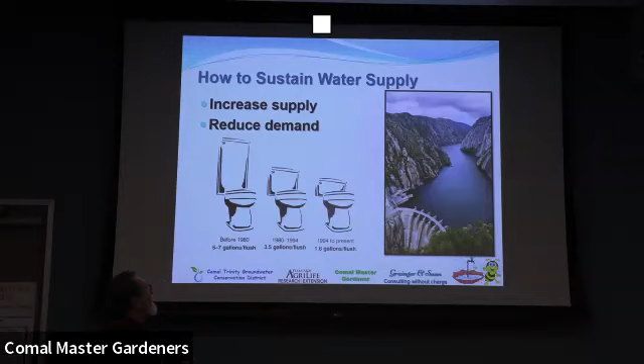So you can reduce the demand for the water. That'll ensure your supply. Well, it turns out that industry is helping us. The declining size of the toilets, you can see that toilets and clothes washing and washing machines for dishwashers, they're all going down.

I recognize that. That's my wife calling.

So you can see the trend is that industry is trying to help us out. And they're doing a pretty good job of reducing the demand on our daily life activities. I often talk about the fact that I keep a 5-gallon bucket in the shower. So when we first start showering, that's where the water goes until it gets warm enough. And then we use that water to water houseplants and water the dog and that sort of thing. So simple things can help save water.

It turns out the state of Texas has a program that was sanctioned by the legislature about 25, 30 years ago, where every year they update a plan. It's a 5-year plan. They take 5 years to develop it, and it looks ahead 50 years. And so they just finished this last one. They call it the 22 plan, but it's actually based on 20 statistics, and they're looking out to 2070.

Well, what do they think is going to happen in this state of Texas over the next 50 years? 70% increase in population and a 17% in water demand. And that is an increase of about 11.5 million acre feet. And I'll get to acre feet in a little bit. Those of you who know me know I'm an engineer and a mathematician, and so I throw numbers out, but I guarantee I'm going to guide you with the big numbers. It's hard to imagine numbers on the scale that we're talking about.

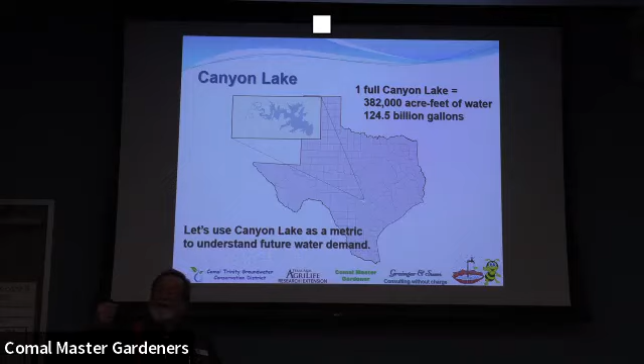Well, that 382,000 acre feet is still a hard number to imagine. So we're going to use it like a spoon. We're going to say, okay, we're going to measure everything in Canyon Lakes. If you had a Big Dipper and you could hold the whole lake. The first thing I want to show you is on a scale of water consumption in the state, how big is Canyon Lake? It's way down here. And that's a big lake.

So who's using that water? This is the growth in municipal demand. Strictly cities in the state of Texas are going to use that much water, and it's going to grow 11.5 Canyon Lakes over the next 50 years. Remember I said we're not going to build but maybe 1 more lake, and it won't be the size of Canyon Lake. So we've got to save water.

Well, who's helping us? How many people in here are interested in agriculture and irrigation? Okay, good. You'll be happy to know that the agricultural industry in the state of Texas is figuring out ways to save water. They're going to drip irrigation in row crops. So the day's coming where you won't flood irrigate a cotton field. You'll have drip emitters on every cotton plant in that field.

The day of the big wheeled sprinkler systems that scatter the water, they're coming to an end. So they're going to reduce it to 8.5 Canyon Lakes. Well, that's still a lot of water. Where does that take us now?

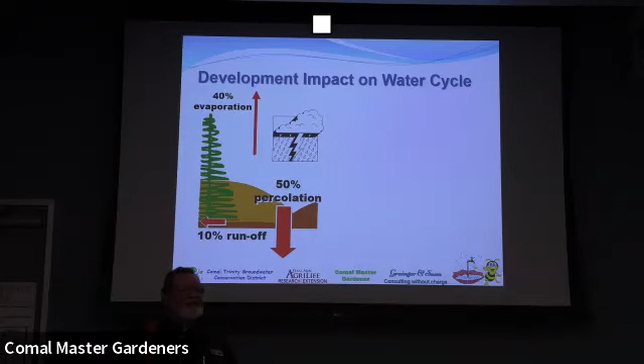Well, as you know, I know you got this in your training, if you have natural land that hasn't been built on, you get about half of that water percolating into the ground. Oh, you get about 10% runoff. But when you start building developments, housing developments, expanding cities, adding roads, you change the nature of the water retention, you flip it. Now you only get about 10% going in the ground, which is what you used to have as the runoff. Now you get over 50% runoff, and that's why we have flash floods. Well, one reason we have flash floods. We do have a lot of natural stone that contributes to that.

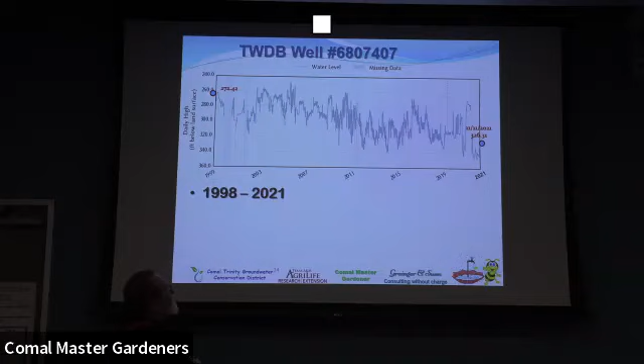This is what that looks like since 1998. This is where the water was. This is where the water is. And when you do a regression through that data, and it's a lot of data, so it's a pretty good curve fit, that decline is 2.5 feet a year. That means if you have a well in that neighborhood area, your well's going down with that at the same rate.

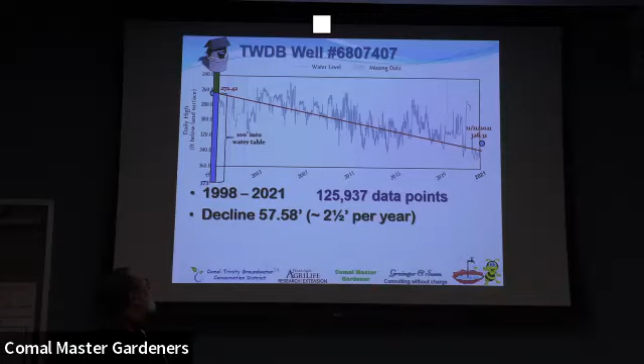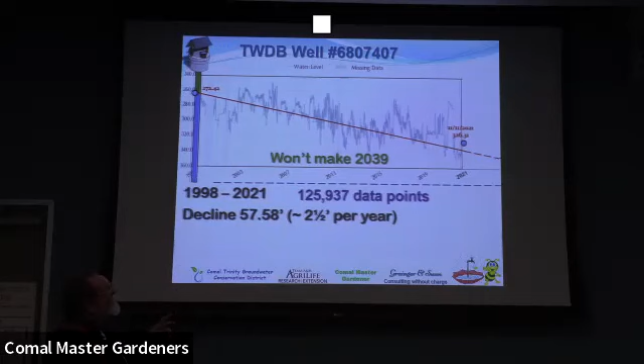And what does that allow us to do? It allows us to look out in the future and say, well, if nothing changed, if no new homes were built and we continued to decline at that consumption rate, where does that take us? Oh, I'm sorry, I forgot one point, and that was that when you drill, you go into the water table, ideally 100 feet, and you won't make it from that water level. There you go. In 2039, that well will be dry because you won't be reaching the water if there is any water below that.

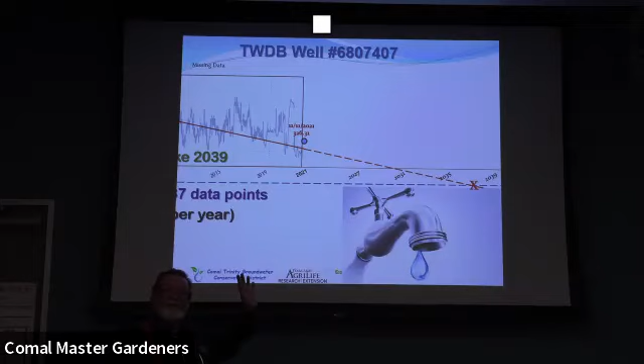So now we can predict how much stress the communities are going to have in the future. And this is not the Edwards Aquifer, this is the Trinity. And Larry's going to have a lot more to say about the Trinity later on. So we're offering you an out. It's not all gloom and doom, it just means you got to change horses.

It's time to change horses and move to rainwater harvesting as your primary source for your surplus water, meaning your outdoor water, or you can go completely internal and have it for your house as well. It's all tax-free with the state of Texas. There's a form that we can provide you, and Larry will explain more about how we come out and do site visits. We're already booked for 3 people in here.

Reducing your water bill is kind of a tricky thing to talk about, but here's what my take on it is. Are you familiar with the concept of take or pay? Take or pay means you buy so much water, if you don't use it, well, they get to keep it. So I pay for 4,000 gallons a month. I rarely have ever used 3,000 gallons a month, and I usually use about 2,200. So I'm paying for water that I don't use anyway off of Canyon Lake.

And my savings in water bills is if I can continue to water when we're in drought conditions, and Canyon Lake says you can't water but Mondays and Thursdays, and maybe you can only water Mondays, and then maybe it'll get as bad as you can only water twice a week. Well, I've had to replace my landscaping twice now, and that's expensive. So I could have saved all those dollars just watering off my system.

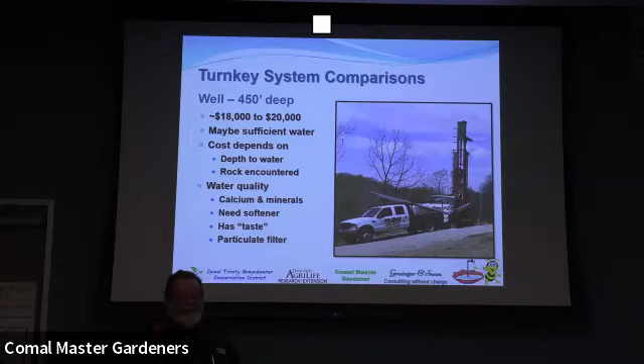Here's the quintessential slide for my part of the presentation. If you are thinking about buying some acreage and you want to put a well on it, this is about what it will cost you and about how deep you'd have to go. As an alternative, you can do rain catchment for almost the same amount of money. In fact, you may save money. And your reliability in the long haul increases your property value. It's not an issue today, but it's going to be an issue soon.

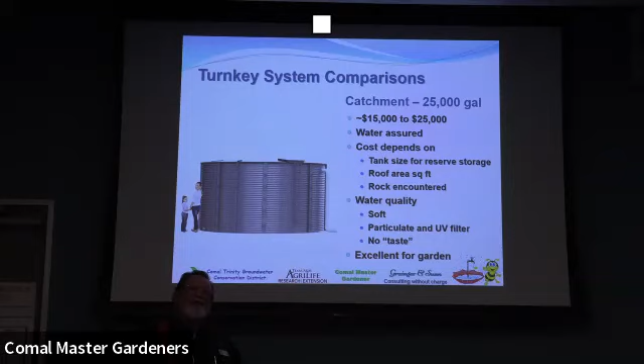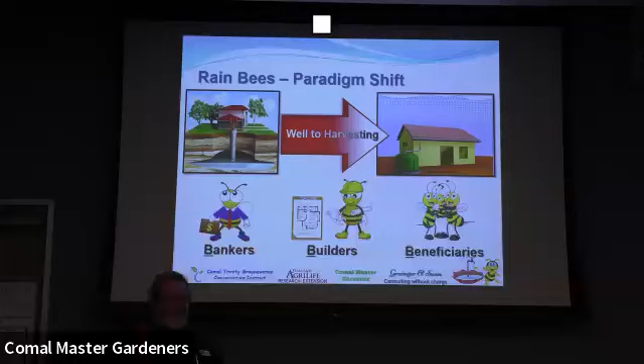So we're trying to do this paradigm shift with people who are building new homes. Don't put a well in, do rainwater harvesting instead. And the people that we're talking to, we want to get the bankers on board that you can roll a rainwater harvesting system into your mortgage just like you roll a well. We're also trying to get the builders to sell the idea to the homeowners, hey, you need to build in your rainwater harvesting system when you're building. That's the cheapest way to do it. It's hard to do afterwards, relatively speaking. And the beneficiaries are you and me. We get to benefit from having better water and more of it.

I am with the Comal Trinity Groundwater Conservation District. I'm the secretary, and our task with the Groundwater Conservation District is to reach out to the public and let you know the situation that we have. We're not trying to be alarmist, but I think in some degree, we need to be alarmed at where we are in terms of rainwater and in terms of the water table that we have in the Trinity.

The Trinity is not like the one that you hear on the news every evening. You hear about the aquifer level. That's the Edwards Aquifer. That's not the Trinity. The Edwards are big buckets of caves of water that we have over on the east side of the county. The Trinity is underneath the entire county, including the Edwards. Where it gets to the Balcones Fault, it goes underneath the Edwards over there. But it's a very slow-moving aquifer.

It starts at Oklahoma at the Red River, comes all the way down here to San Antonio, doglegs all the way out to Ozona. So sometimes when I say that, people say, well, if it's raining in Dallas, we ought to get water here. We don't. We get the water that falls here, and that water takes a long time to get to the water table. 3 years.

No matter which of the systems you are going to be looking at, they have three basic components: the storage tank, anything that happens before the storage tank, and everything that happens after the storage tank. So I'd like to start out by talking about the pre-tank process. We want to filter the water or screen the water as best we can before it gets to the tank. And a couple of ways of doing it.

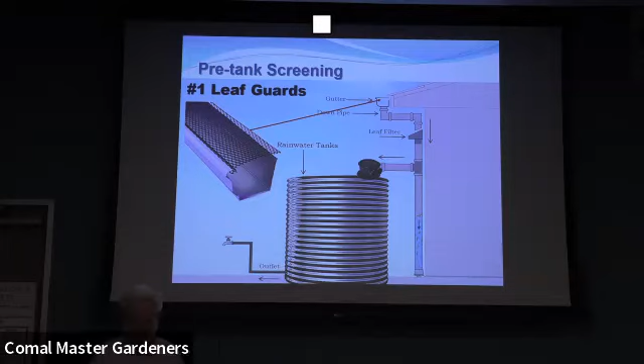First thing we can have is leaf guards on top of our rain gutters. It does not have to be the real fine stuff that the water has difficulty getting through. Open weave, such as you see right there, is perfectly acceptable because we're going to have a second stage, and the second stage is over here, what's called a leaf filter. And the leaf filter has a screen on it that is very similar to something you'd have on your screen door or your window.

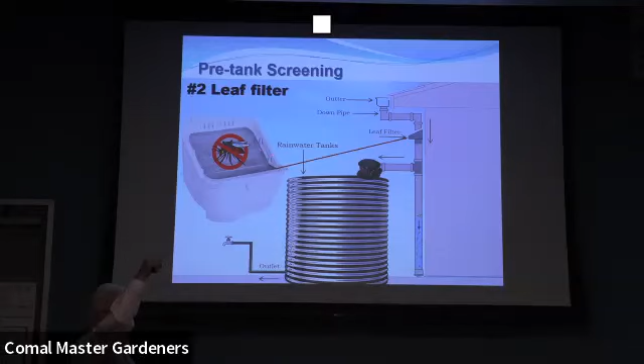And so that screen is going to take some particulate. It's going to fall on top of that screen that you see right there. And as it falls on that screen, it washes away and the water goes through. And that leaf filter also is going to help keep mosquitoes out of your system. One of the things you want to make sure you do is seal the system so that mosquitoes don't breed in your system.

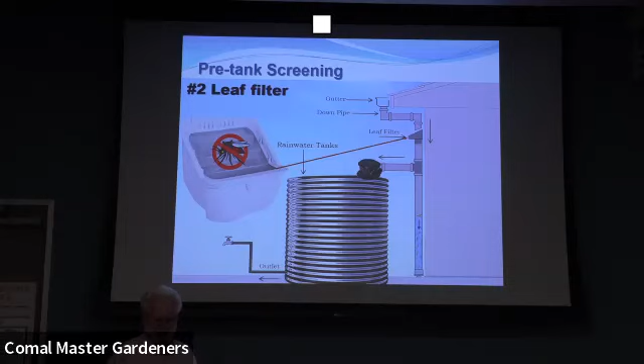You could also use a pair of pantyhose. Theoretically, you could just attach it to the water pipe that goes in there and let the water go through, and it will catch the particulate. And every now and again, you might have to clean that out, basically put a new one on. But what we want to do is get it down to about 180 micron. Now, how much is that?

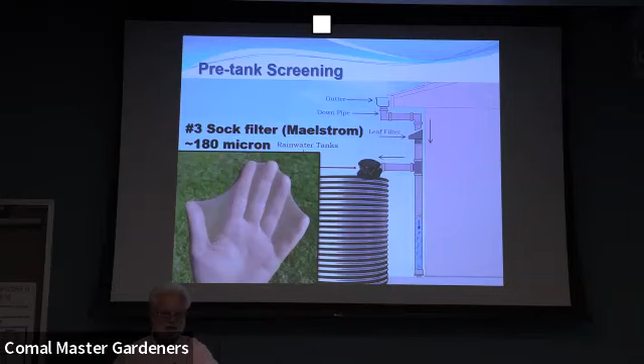If you were to yank out one hair... not you, sir. If you were to yank out one hair and then two more and put them side by side, that would be about 210 micron. One hair is 70 micron. So 180 micron is a little smaller than 3 hairs, okay? So you get an idea: we are screening the water to finer and finer quantities as we get to this point. Now it's going to go inside of that particular tank.

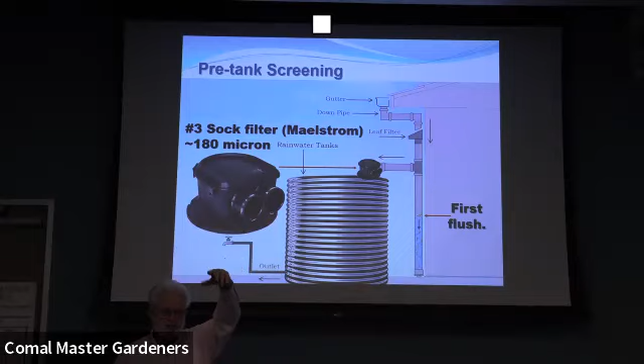If you do research on this, you will hear of something called first flush. And first flush is kind of a code name that says if there's no rain for a period of time, dirt, dust, pollen and silt drop on top of the roof of your building, and maybe you might get some bird poop up there, a squirrel that poops up there or whatever, and that's going to wash off when the first rain starts.

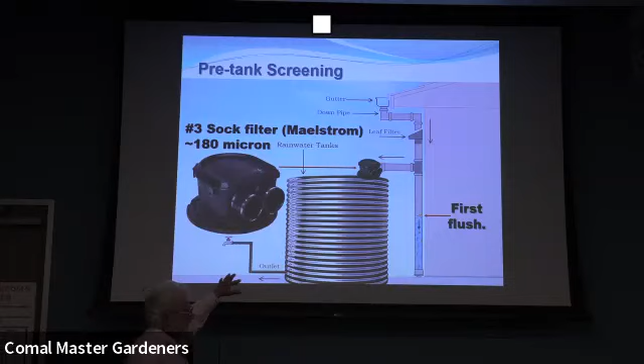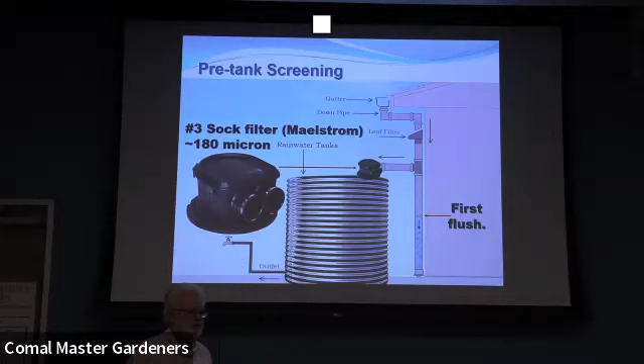So a lot of the theory behind first flush is that we want to capture that water and put it into some sort of a pipe. And you can see that right over here. This would be a first flush pipe. The dirtiest water, if you will, falls in there. How that works in a basic situation is the dirty water comes from your roof, and as it moves along over your roof, it falls into that little trap.

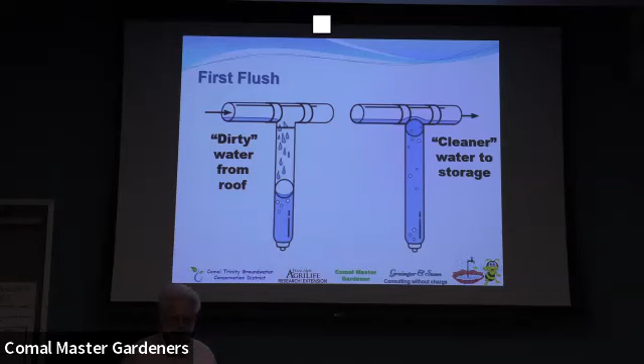And there's a ball in there, and this handy dandy little ball over here starts rising to the top. And when it gets to the top like that over there, the cleaner water bypasses it and goes into your system. Now that sounds like a really good system, and in fact, it does work, but the problem with them is they are a pain in the asparagus.

And the reason why they're such a pain is because first, they are almost always undersized. For every 1,000 square feet, you need to be able to capture about 10 gallons. Let's just assume for a moment that that building that you see in that photograph is 1,000 square feet.

So now the water is going to drop into this little first flush pipe, which is this part right here. This part right down here at the bottom, that's a 3-inch pipe, and it holds less than ½ a gallon per foot. And so if we are able to collect maybe 3 gallons or 4 gallons, we'd be lucky. So one of the problems is they are terribly undersized, and therefore they don't work very well.

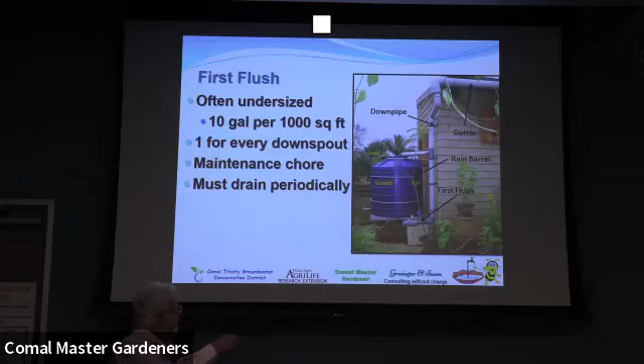The other thing is every time you have a downspout, you've got to have one of these things. And that means that somebody, you, has to go out and open up that valve on all 10 of them if you have 10 downspouts, and that becomes kind of a pain. Now, some people will expand the size of it by having several larger tubes like you see right here, or in this case, a 6-inch pipe that you see right over there.

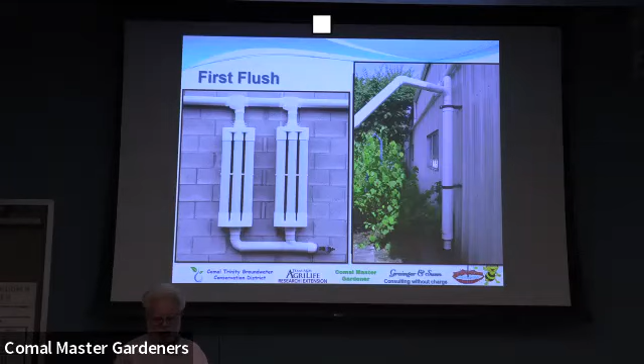But the problem with that is water is very heavy. And so because it's heavy, you see that bracket up there is already starting to fail because that water pipe is so heavy. So when we talk about first flush, a first flush system is a good system, and it can function if it's big enough. There's a second system that is a first flush system that's called a tank system. This is what I have.

My tank is 50,000 gallons. That's way too big. You only need about maybe 25 or 30,000 for most homes. I got a 50,000 gallon tank because I had enough room to put it there, and it was the same price as a 30. So I got it. So it was kind of a simple economics issue.

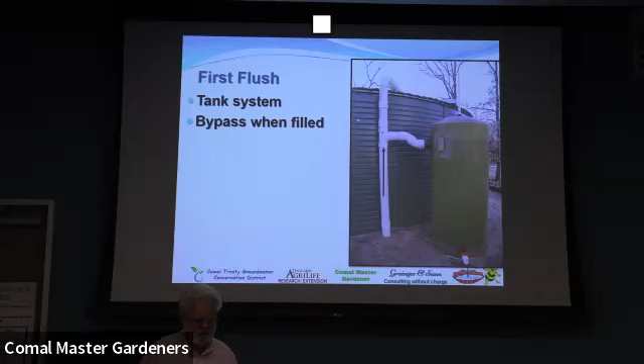I have a little valve that's down here at the bottom. You see at the bottom of that tank, that valve goes over to my garden tank. I have a separate tank, and it pumps it over there to the garden tank, and I use that to water my garden, and the plants absolutely love rainwater. You all know that already.

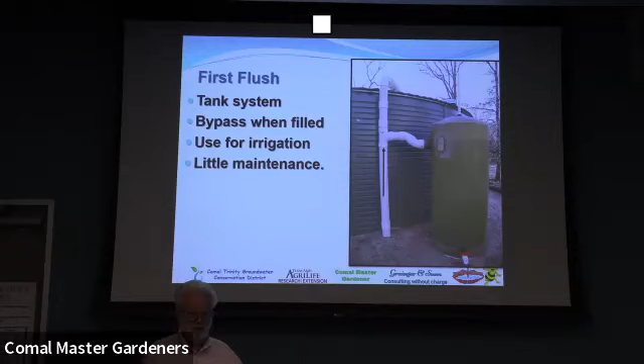Very little maintenance on that kind of a system, and that's the good thing about it. So if you decide that you want the first flush, I would strongly suggest this kind of a system, not the individual first flush system. Stephen on his system does not have a first flush at all. So I'm saying that because it's important that you know you don't have to have one. You can have one, and if you decide that you want to have one, this is the kind that you ought to look into.

All right, so when we look at containers, how do we store all of this water? Well, there's everything from rain barrels to wooden ones, to metal ones, to all kinds of different kinds of canisters that you can use, some very small, some very large. Whatever you have access to and available, you can do. You can have individual small tanks, a whole bunch of them linked together as a daisy chain, and they can be used that way, or you can have a larger tank.

Stephen's tank is 25,000? 30,000 gallons. And so we're looking at tanks that are fairly good size, and I'll talk a little bit about how you would determine what size you might want to have when we get there just a little bit.

All right. It's very important that you understand that no matter what you're going to do to store the water, water is extremely heavy. And these 4 barrels that you see here, these 55-gallon drums, they are almost a ton. That's a tremendous amount of weight. So obviously, whatever support system you have underneath it has to be able to support that weight, and you have to worry about that falling over on youngsters. So be very careful about what you do in terms of elevation and how you secure those things so that they don't fall over. They are very, very heavy. 8 1/3 pounds per gallon.

All right. So then the next thing is what happens after the tank. We talked about the pre-tank screening, then we talked about the tank. So now let's go into the post-tank process, everything that happens after the tank. Almost always you will need some sort of a pump to distribute the water. And it's not because you couldn't use gravity if you have gravity, but gravity doesn't push it hard enough usually for you to have it in your home at a pressure that you want, like a shower.

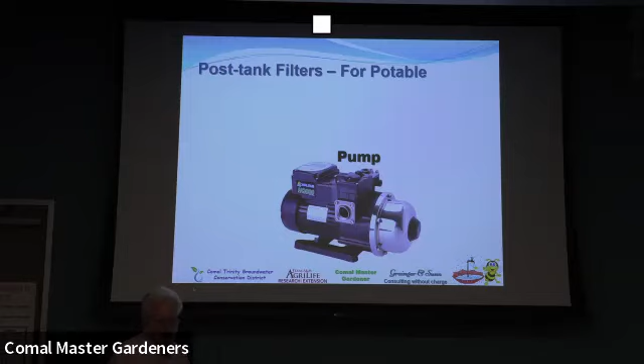In addition to that, no matter how you're going about the system, you want something to be able to convey the water. Pumps push water, they never suck the water. They are pushing the water. So the first thing that you'd have is a pump. And so now you got the water that comes out of the tank and it goes over there to the pump. The next thing that's going to happen after that is you need to filter the water. So you need a filtration system. And this is kind of a typical system.

And the reason why we want to go to 5 micron is because if we have any pathogens in the water, as the water goes to the next step and it's swirling around inside the UV filter, if it's a larger particle than 5 microns, it's possible for pathogens to hide in the shadow and not therefore be rendered inert. So 5 micron is kind of important as we get to this point,

and it can be just a particulate filter that is basically dust and dirt, or it could be a carbon filter if you wanted to get taste out of the water. Like if you have a well and you want to get the taste out, you'd use a carbon filter. You do not need to have that for rainwater because it doesn't have a taste. Now, do some people use them? Yes, they do. And so it's kind of like your choice. I don't. This is basically my system.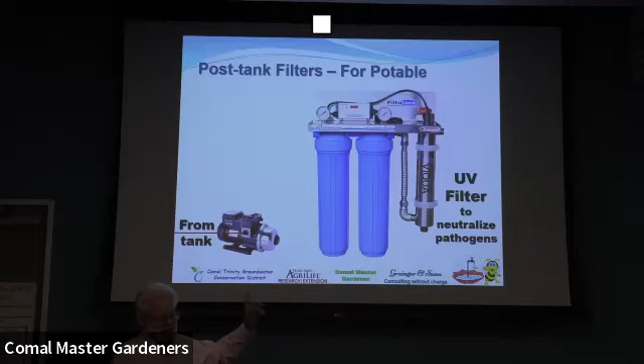Then after the water goes through the 5-micron filter, then it goes through a UV filter, and the UV filter will neutralize any pathogens that happen to be in the water. It doesn't really take them out. It doesn't really kill them. What it does, it makes them unable to reproduce, and therefore they are safe. So are they still in the water? Yep. Are they harmful? Nope. So what happens is by the time the water gets out of this system now and goes through there, you have pure water.

And it's going to be more pure than you get from a water purveyor, truly. So what's involved in the system? That's it. That's the entire system. That's all you need. That pump right there costs about $425. That filtering system, you can buy that whole system all put together for about $1,000. So for $1,500, you have pure water. And that will run an entire household of water.

Now, in my system, I added a few bells and whistles. And you can do this depending upon whether you want to or not. First, this first filter over here, this 20-micron filter, I don't want to change that all that often. I don't want to change it once every quarter. I want to change it once every 9 months. So what I have in my system is a little spin-down filter that costs about $50.

And this little spin-down filter causes the water to come in, it spins around inside of here, and it goes into the little bowl that you see down here at the bottom. And then about once every month, I go out there, turn this little valve right here, and it washes all of that stuff that fell in there, and it goes away. And then this filter is going to take it down to almost 20 micron. So now when it gets to my 20 micron, I don't have very much that I have to worry about, and therefore I don't have to change it as often, and so I put that into my system.

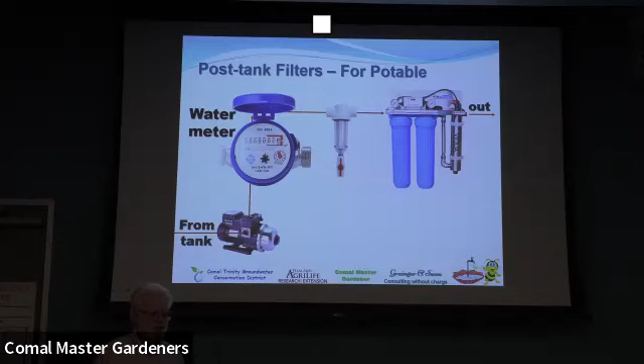Do you have to do that? Nope. Can you do that? Yep, and it's pretty easy to do that. I also wanted to know how much water we are physically using every month, and in order to do that, I bought a little water meter, and the little water meter cost about $50. And so I put the water meter in there to tell me how much water I'm using.

Now, if you're really clever and you want to also use rainwater in your garden, one of the things you can do is bypass that by having a little valve that you're going to put in right about over there and pump it out to your garden so that you have water that's rainwater that is not purified.

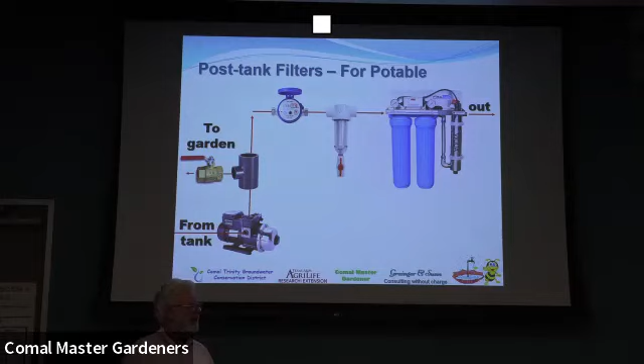You know what's really ironic? And Stephen, this is one of my favorite quotes from Stephen. What's really ironic is we spend thousands and thousands and thousands of dollars purifying water to drinking standards, and we dump it on the ground. Think about that for just a second. That is such a waste. And here you can take your rainwater and you can dump it on the ground, and it is there the way it is supposed to be. And your plants love it anyway.

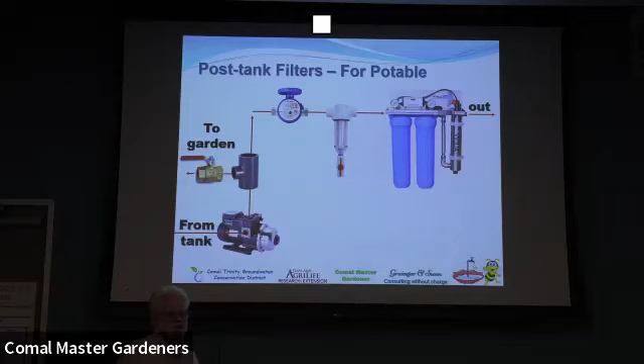All right, so that's basically a system. Do you need all of that? No, you don't. You do need to have a pump, and you are going to have that filtration system that you see in the upper right-hand corner.

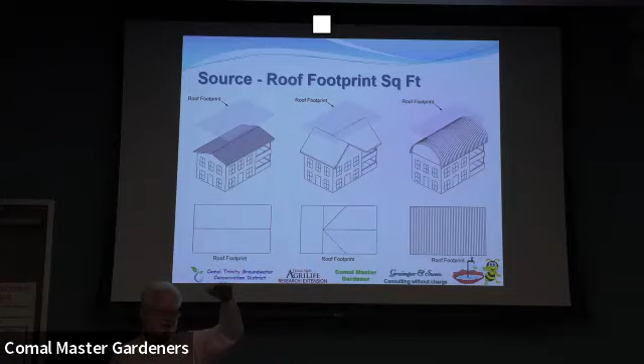All right, so how much water can we collect, and then what happens to it, and how much do I need? First, rain falls straight down. So it doesn't matter what the shape of your roof is. You don't have to calculate the hypotenuse of the right triangle in order to determine stuff, because rain comes straight down. And no matter what the shape of it is, that water is going to come straight down. And if these buildings are all the same size, no matter what the shape is, the same water will fall. So you get the same amount of water on there no matter what the shape is.

Then secondarily, what we know is that for every 1 square foot of space that you have, you will gather 0.62 of a gallon of water, 0.62 for every square foot. So we start doing some quick math, we'll do the Stephen kind of thing.

And I keep picking on him that way. I'm a statistician. My doctorate degree is in statistics and research, taught statistics for 25 years at the University of Redlands, go Bulldogs. And so math comes easy to me too.

So, but nevertheless, if you have 1,000 square feet, you can get 620 gallons of water with 1 inch of rain. We got 1/10 of an inch of rain today, by the way, only 1/10 of an inch. But for every square foot, you're going to get 0.62. And if you look at 34 inches per year, guess what? We have 21,000 gallons of water that falls on your 1,000 square feet.

Now, the question that most people will ask about this point is, well, how do I calculate that for my house? The simplest way to do it, I like this little ballpark kind of figure. The simplest way to do it is if you look at that house up there, you see the dotted line. The dotted line represents the concrete slab. The little overhang that you see outside of that, that's this area that you see outside of it here, is the overhang that you have on your roof.

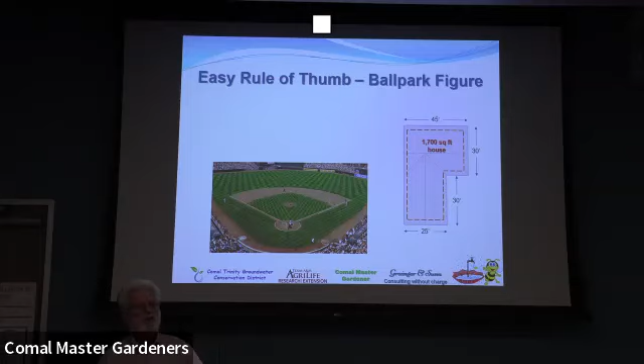And as a good rule of thumb, it's about 20% of the size of your roof. So all you have to do is calculate the square footage of the house that you have, including the garage and patios, and then add 20% to that. So just simply add 20%. If it's 1,700 square feet in the house that you have, multiply that by 1.2, and we have roughly 2,000

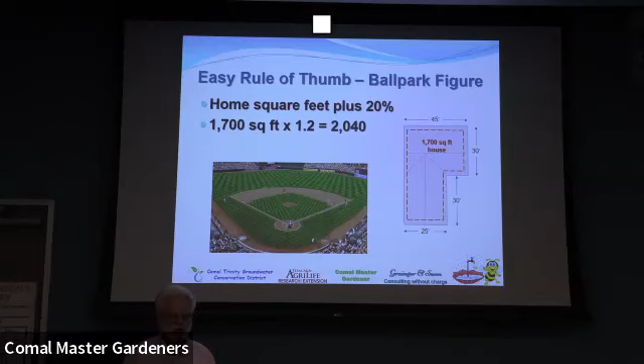square feet. So we know that in 2,000 square feet, 1 inch of rain is going to give us 1,265 gallons on that house. And in 1 year, that house is going to gather 43,000 gallons of water. That brings us to the next point, and that is, how much water do I need to have? How much do I need to store? How much do I use?

And so when we talk about demand, as a general rule of thumb, people who are just using water normally will use approximately 50 gallons per person per day. Stephen and his wife Sheila use somewhere about 30 gallons per day because they're conservative. And I think if you're collecting water, you tend to be more conservative. Nevertheless, about 50 gallons per person per day.

So if you have 3 people living in your household, you're going to need to have 150 gallons of water per day for indoor water use. This does not include any outdoor use. So then some quick math is we multiply that by 30 days, and we know that we're going to need 4,500 gallons per month for our household.

So now you ask the question of yourself, how much water do I want in reserve? How much water do I want in my tank in case we have a drought and we don't have any rain? Well, by the way, here in this part of Texas, we have never had a drought last longer than 87 days. Never. And so even when you look at the 2011 drought that we had, we did not have more than 87 days. So to be safe, you want to have at least 60 days. I suggest that you have 90 days.